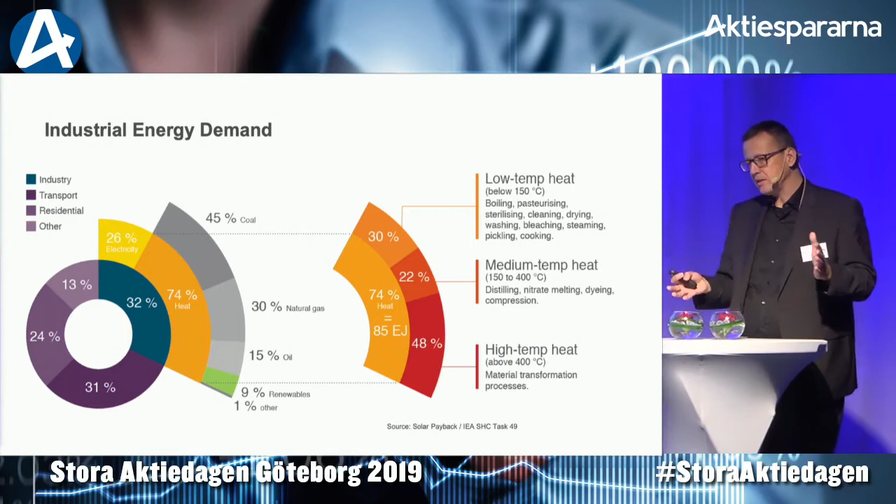Then comes a range from 150 to 400 degrees C. It's, for example, distilling or tire production for the automotive industry, or also the paint shops in the automotive industry, chemical industry, many processes that require temperatures between 150 and 400. And then last but not least, you have a big chunk, almost half of the thermal energy demand, which is for higher temperatures, like for metal and glass and others. And with our solar technologies, we are addressing the lower 50%, the range up to 400 degrees C.

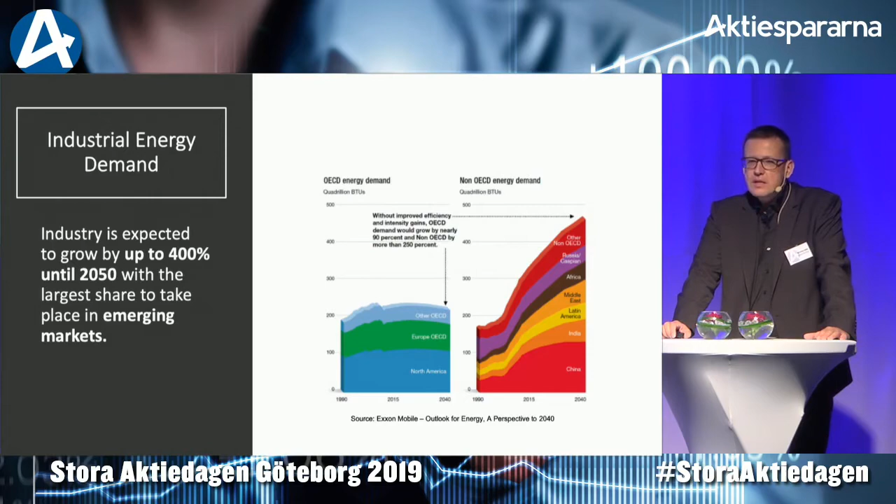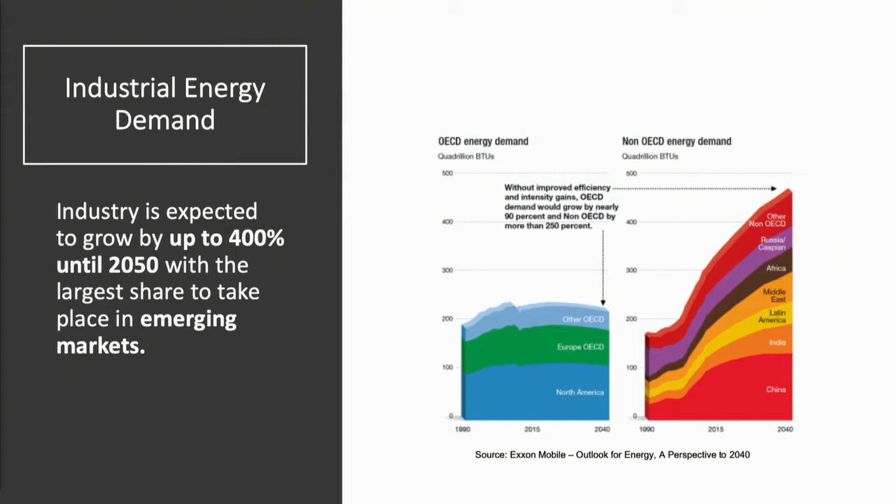This slide shows you the industrial energy demand, and it's very interesting to see that the main growth of industry is to be expected in the emerging markets, not in the OECD countries. It's in the non-OECD countries. And you see here countries like China, India, Latin America, Middle East, Africa. There will be the growth in industry. Not going to be in Europe, not going to be in Germany, not going to be in Sweden. And most of these countries are in regions where you have plenty of sunshine. And this is exactly the market that we are addressing. So they expect like 400% of the industrial growth until 2050 happening in those countries where we have plenty of sunshine.

Also interesting to see, when we look at the plans for the 2-degree scenario, that the power and refining sector should achieve zero or even negative emissions, and that around 2050, 2060, industry will be the main emitter of carbon dioxide. All the other sectors will come down, will reduce their emissions, but industry will remain at a rather high level, according to those scenarios by the International Energy Agency. And this is exactly the point where we have to act, and this is our market.

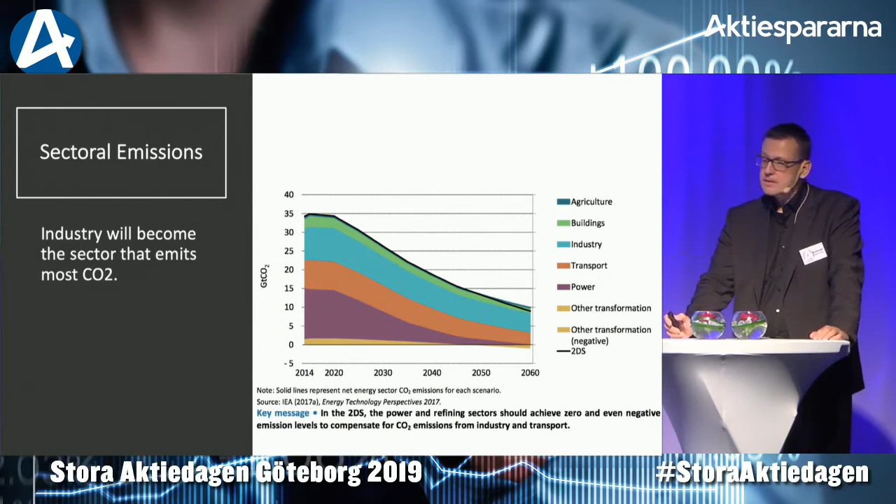So, as I said at the beginning, we are a one-stop shop. We have a rather broad technological portfolio. We are offering all kinds of different solar thermal technologies, but we also offer photovoltaics. So we are designing a system which meets the demand of the customer.

For customers that require higher temperatures, we have our own product. That's our flagship product. It's this linear Fresnel collector. It's a uniaxially tracked collector, which is concentrating sunlight onto a vacuum receiver, where the radiation is converted to heat. And in this vacuum receiver, we circulate a heat transfer fluid. It can be either oil or pressurized water, or we directly generate steam.

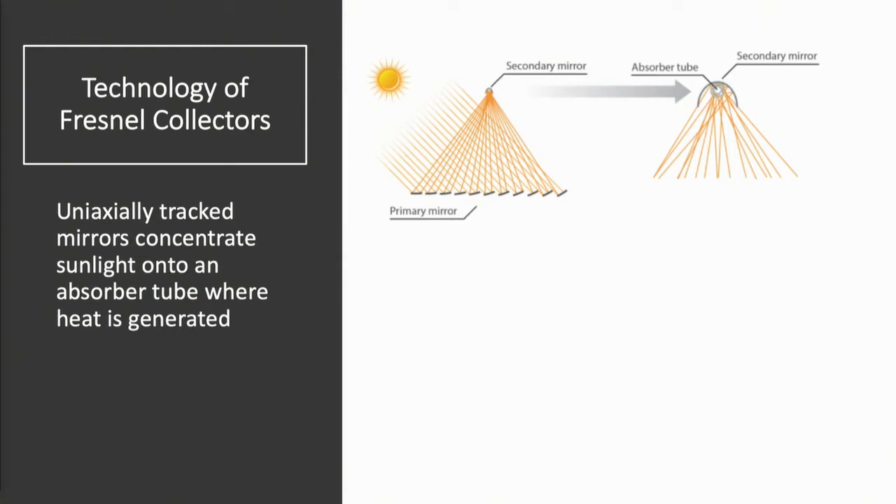And from a technical point of view, we have developed a product which is modular. So we have modules of a length of 4 meters, and with these modules we are building strings up to 100 meters. And for 1 megawatt we need about 80 modules, that is 4 strings with 20 modules each.

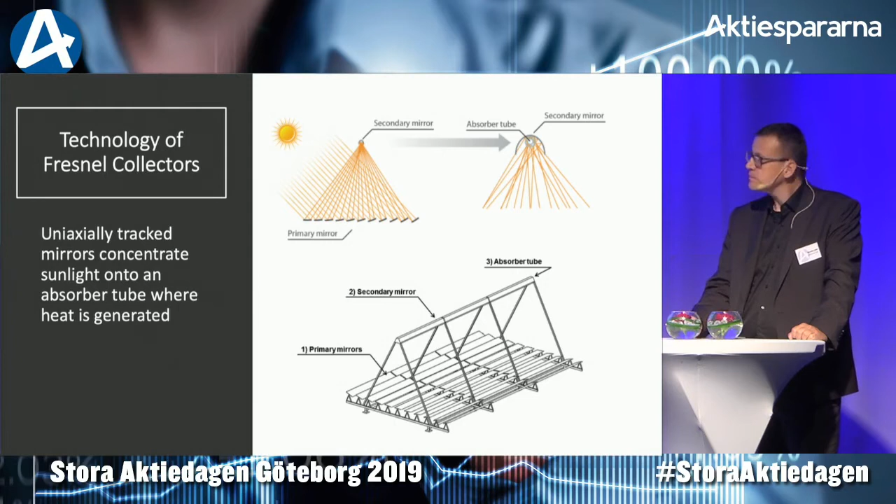Integration of solar technology in industry is a big topic, and we have realized that this has become a very important sales argument for us. You have some kind of customer, let's say a brewery, and they tell you, yes, we want to reduce our emissions. Can you help us with your solar technology? And we say, yes, what's the temperature you need? And they say, yeah, we have some processes that operate at 80 degrees C. Can we use solar energy there?

And we say, yes, so then we have to tackle your production process. We have to integrate a heat exchanger at a certain point. And then typically the reaction is, I don't want you to touch our production line. And there, it's nice to have our concentrating linear Fresnel collector, which can generate high temperatures, because there we integrate directly on the supply level. We don't touch the production line.

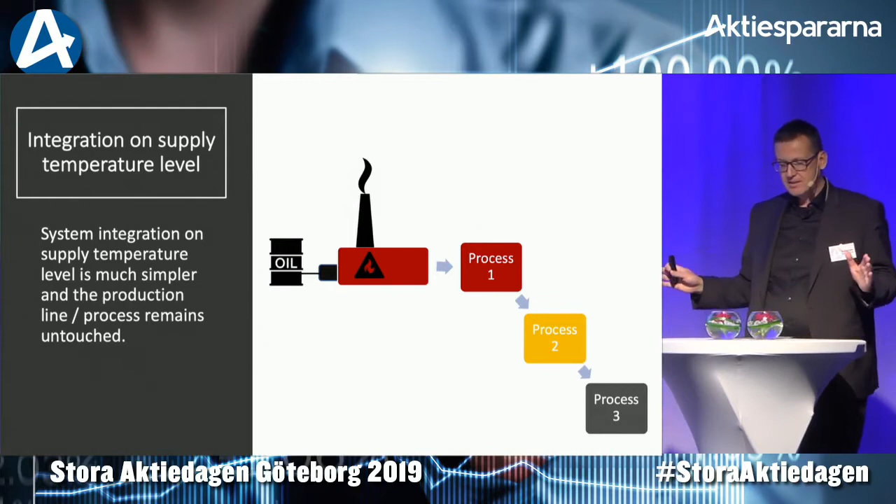We just connect to their steam grid, to their pressurized water grid, and we inject the heat on the supply level, meaning we are injecting heat on the level where the conventional system is feeding the system. So where we have a steam boiler, for example, that is fired with natural gas or oil, that is, for example, providing steam at 180 degrees C, and then the 180 degrees C steam is going to the first process.

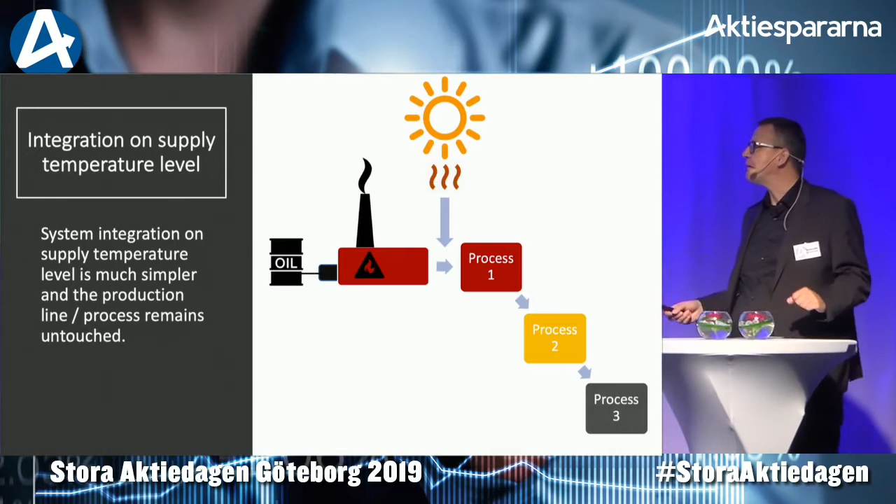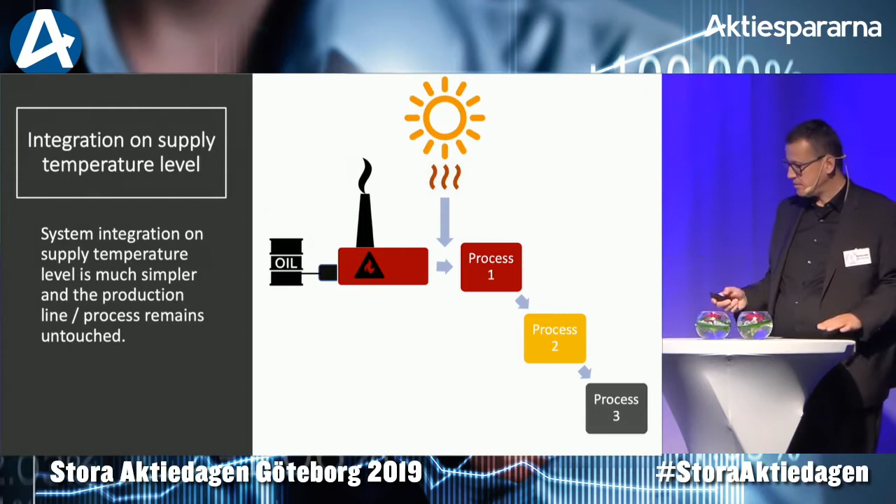Then you can use waste heat from the first process for the second process at 140 degrees C. And at the end of the day, you can use the waste heat from that process, for example, for bottle washing. So we don't touch the system, we integrate on the supply level. This has become a very, very important sales argument for our technology.